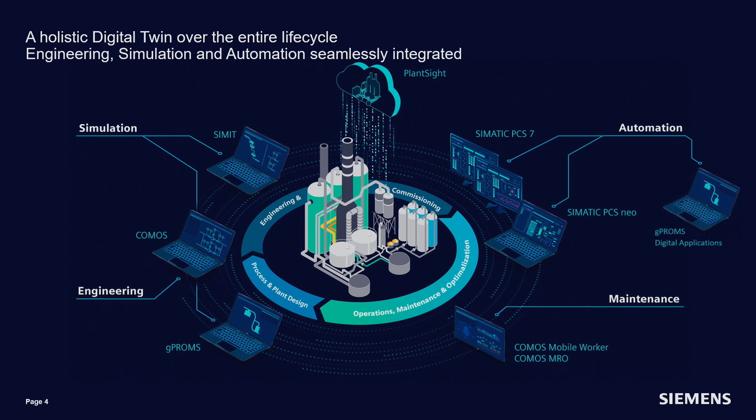We have bundled multiple products inside our software segment. Looking at this picture, we start very early in product design with our simulation suite, with gPROMS for the molecular design of products. It's interesting for us in COMOS for engineering, for the feed engineering phase, to reuse this data. Looking further, we do basic and detail engineering in COMOS, and also with COMOS PCA the first draft of automation software.

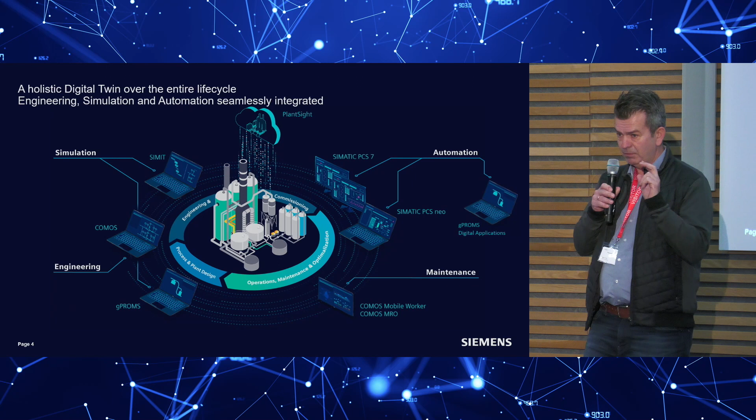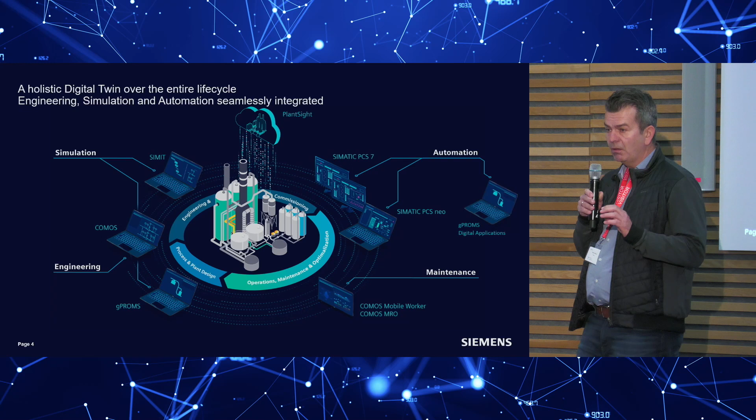It's interesting to simulate the automation software early with SIMIT, and here we're also talking about the exchange of process data. We can think about developing an interface multiple times, or reusing a standard like DEXPI. Looking at the whole picture, we always have this challenge, and we believe at Siemens that we can reduce the amount of development if we focus on industry specific standards.

Looking at the whole life cycle of a process plant, starting with greenfield engineering, but then really a long phase of brownfield engineering - redesigns, upgrades inside the plants happening every day - that means also changes in the documentation.

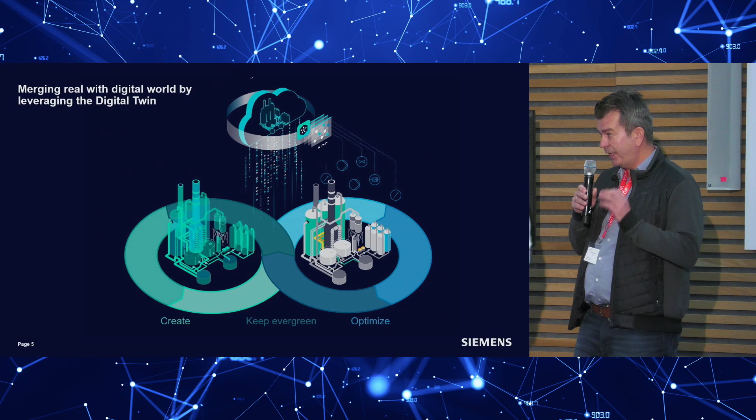That's not always good for us with our solutions. Very often EPCs, engineering partners, are involved using their own tool sets, and then data handovers are always a challenge. That's also a reason why we are here, why we think it's a very nice idea to have this community here to participate, because the main topic is really to be open and to communicate also with other authoring systems across the complete lifecycle phase.

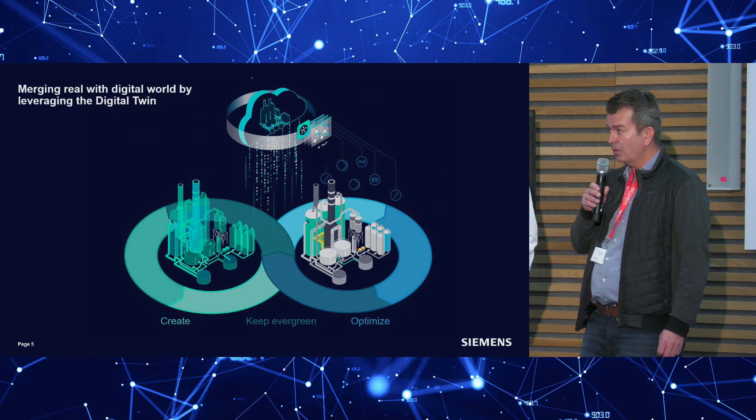With these words, Helge will take over for the presentation. Without much further ado, right? Okay. No problem, so let's do that.

That is the demo content now for my portion over here: get a P&ID in, get datasheet data in, merge that, show that you can search and query it, and potentially change it eventually, and get that out into a DEXPI format.

In the end Ziggy will come back and show you a future development, an outlook on how we would like to use DEXPI as well. We committed as Siemens to use that not only externally but also internally to communicate amongst our tools. We were asked what could you do to get bonus points or credits on ideas how to evolve that potentially.

So let's do that. First thing is get the P&ID in. I've now loaded up our application, COMOS, which is the engineering workbench. I will later also talk about how to use the web front end, but this is more the heavy lifting application for changes. Since I'm supposed to do a change, I will open up the client application. You can also view, query and visualize data in the web front end.

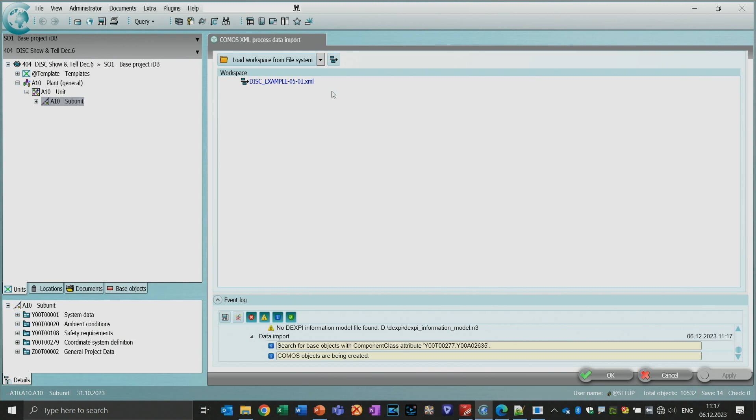So it's now creating objects in the database, as we call it. The object in our database, with object-centric design, is a digital representation of the engineering item, or later in the lifecycle also of the physical operated item. It's done now - so I've got my P&ID over here.

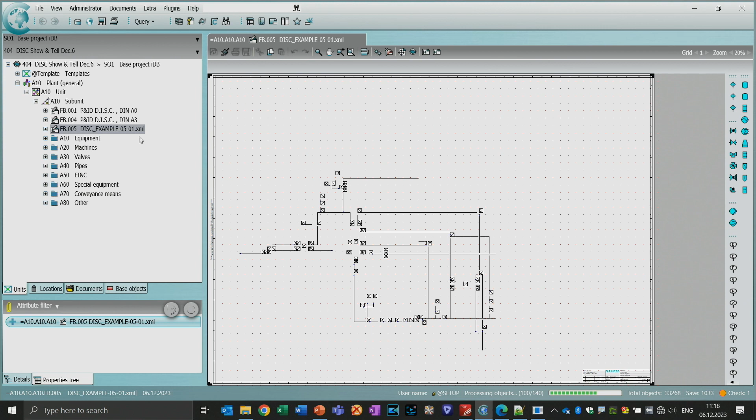Well, which is a fail. Oh boy.

So now you see that it is a live demonstration over here. Okay, let me do that once again. It was just working out fine. I'm not sure what happened here.

Say yes, otherwise I need to pull up the video. Sorry for that. Yeah. I need to hurry up then. Oh boy.

So what I said, we can blame Michael then later on. We really understand the risks of doing live demos, so we really love you guys for actually taking that risk. So we will be patient. Yeah, no, thank you.

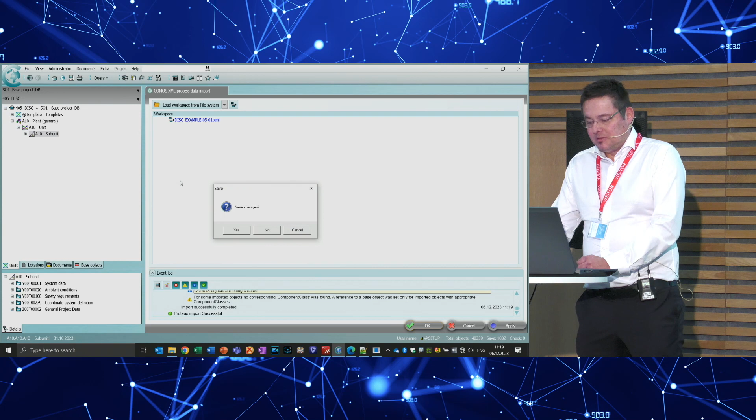So, Proteus is completed. Huh?

Oh boy. Okay, then I need to fall back, just what I did a couple of minutes ago. No, that should work out fine without internet.

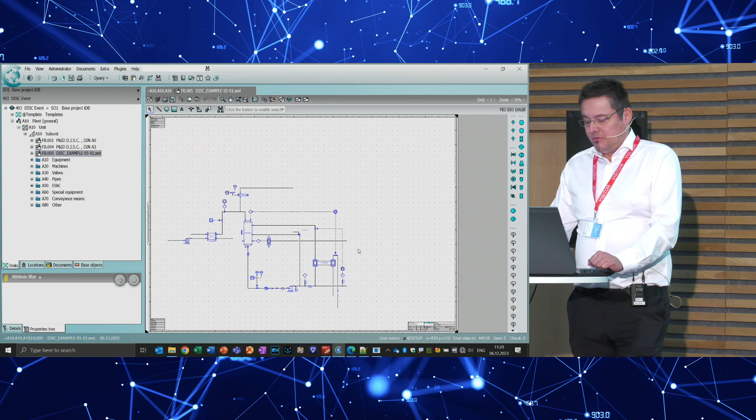So that was actually the way it's supposed to look like. Sorry for that. We'll figure out what the problem was, and then please come to our booth and we can redo that. Unfortunately, so that's the way it is supposed to look, right?

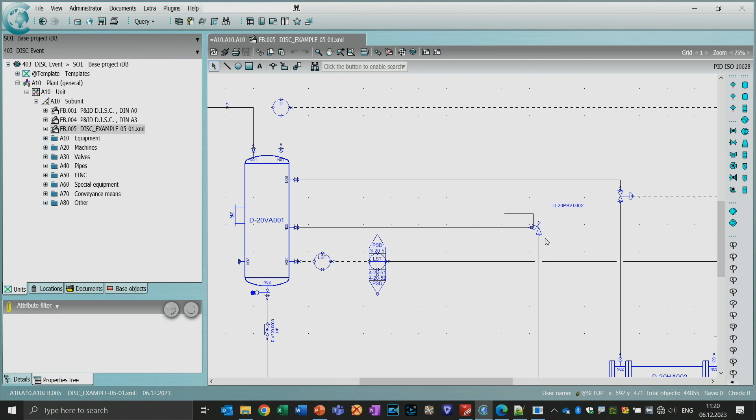After the import, just did that in half an hour ago or something like that. So what we do here is we create the items in the database.

So we have all the items created over here. I think the most important thing is that we also have the pipe objects created, which is the biggest benefit, I believe, with DEXPI, that you have a suitable pipe model. So we can create the objects, the graphics, but also the associated data.

And now we need to come to upload the data to the item. So what we did here, we mapped our class library that we have in Comos, not only to DEXPI but also to the PCA attributes. So we created PCA attributes with their identifier.

We created different views to a single item, so we can have a functional view to the object. We can have a product view to the object. And what I will now do is upload data to this item

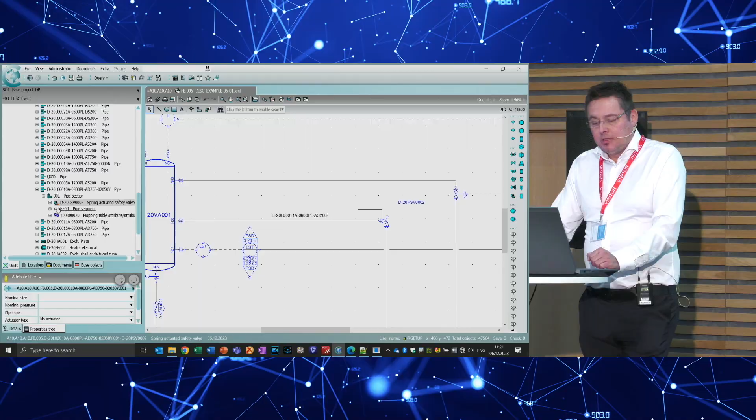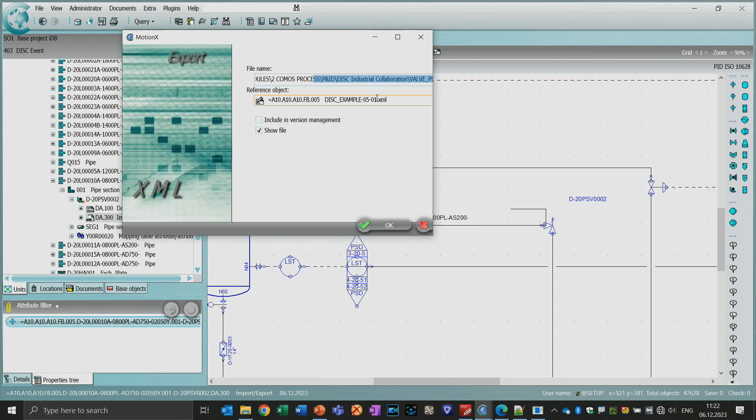through a text file. Yeah. So what we actually did here is we were not using, for the sake of this event, the TTL format or the JSON format. We were using here an XML format. Yeah, so for that moment, the way it looks like is this, like this guy here.

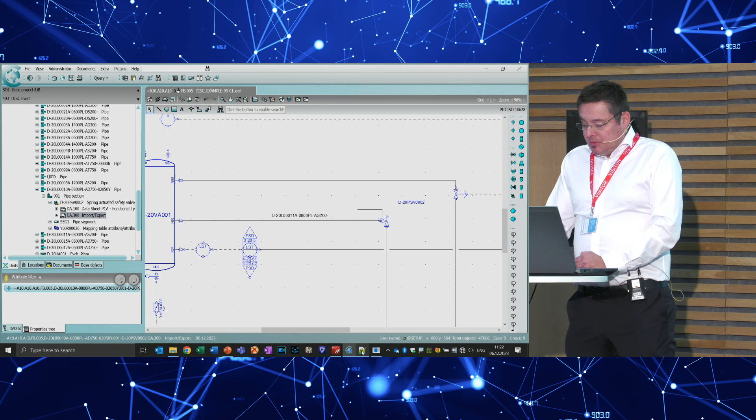So JSON, as required, would require some additional configuration here to map to this particular format. But now, what I can do is I can import data, so I can manipulate this XML file for the import.

Just reload it once again to prevent further hiccups as well. So what I can now do is upload some data. In this case, I need to fill it out manually over here.

Yeah, I've already typed in some values over here, some technical data. Save that. And start the import.

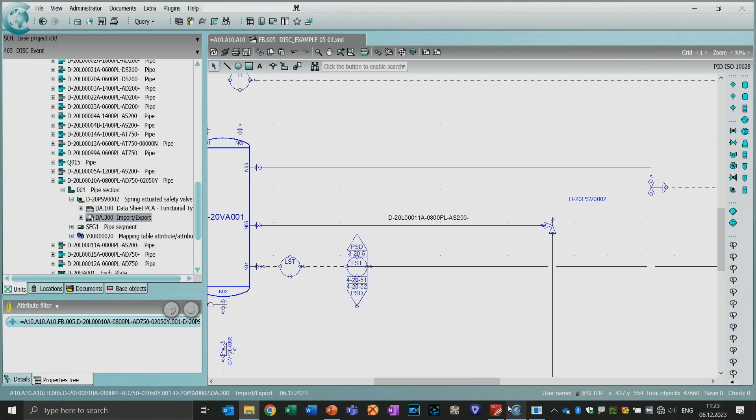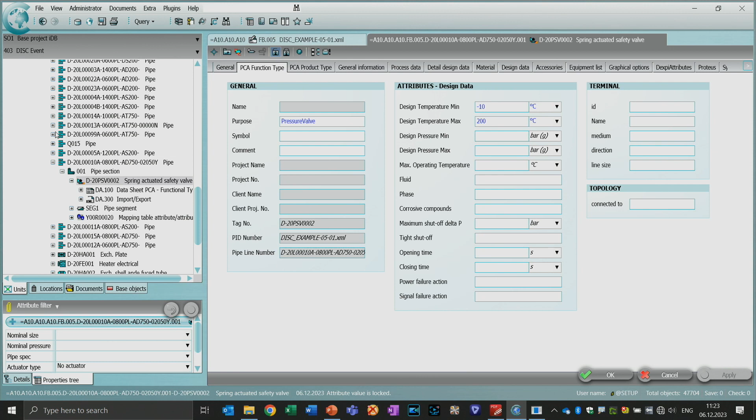So when I open now my data sheet, my data, then I have my data view over here. So I've uploaded my technical data here. This is one view. I can now create a data sheet view as well.

Yeah, that is another view, more suitable to the engineers. I can do an upload, or a different view could be a product type of data sheet. Same or similar data set, but then in a different style, in a different way.

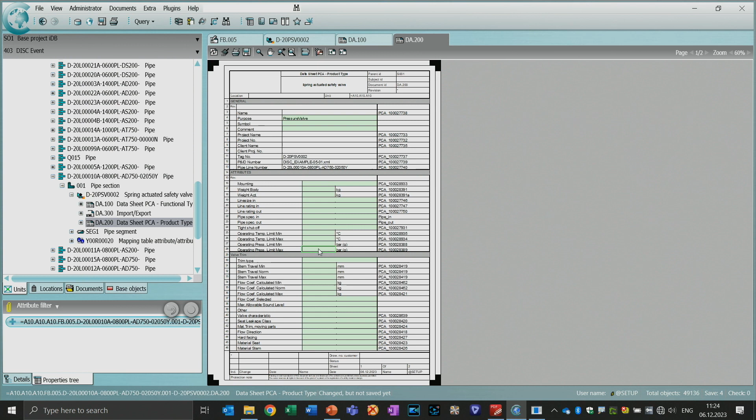Yeah, again, all mapped to the PCA data so far. So we did that conceptually for the proof of concept, or for this event, not proof of concept.

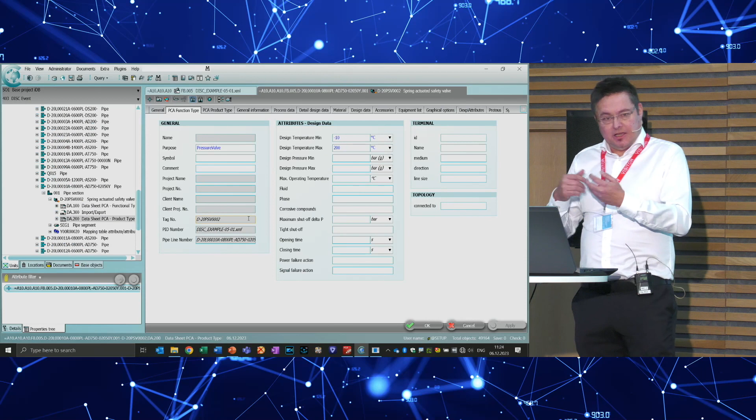So I can query my data. So this is one type of visualization, yeah, data type, more suitable data sheet type. The data sheet layout can be adapted, can be made available through the web browser as well.

So, and then I can query my data. So for instance, I want to search for that particular valve, and I have a searching engine over here, so maybe just search by its function. Yeah, then I can find that.

It's now, since I have it as an object in the database, it's interactive. That means it creates kind of a logic. It's navigatable. Yeah, so I can search for tag IDs, for descriptions, for technical parameters.

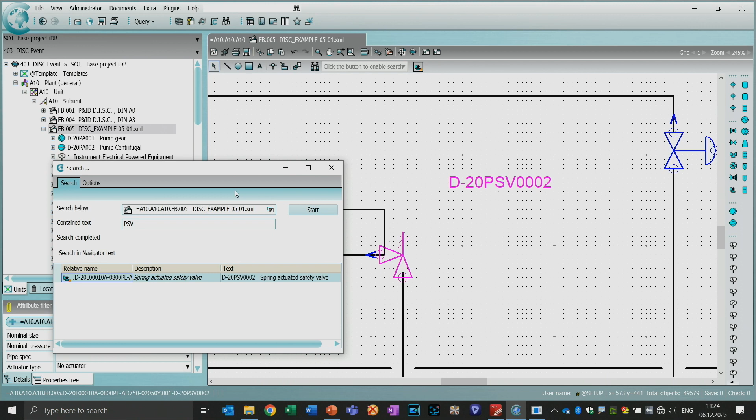But I can also navigate now through the package. That means this object knows to which other objects it is connected to. Yeah, so I can query and navigate, let's say, from this guy over here to its connected items. Yeah, then I see here, okay, this is connected to a pipeline over here.

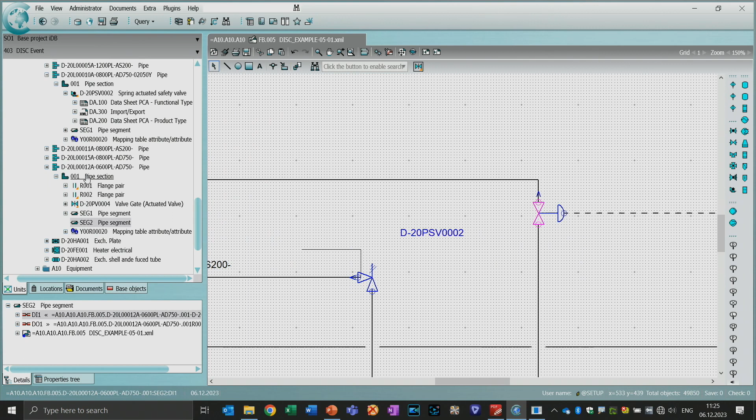And as much, I can navigate, once I have the connectivity information through the DEXPI, I can navigate through the whole package. I can open up a query and query data. I'll save that for the moment.

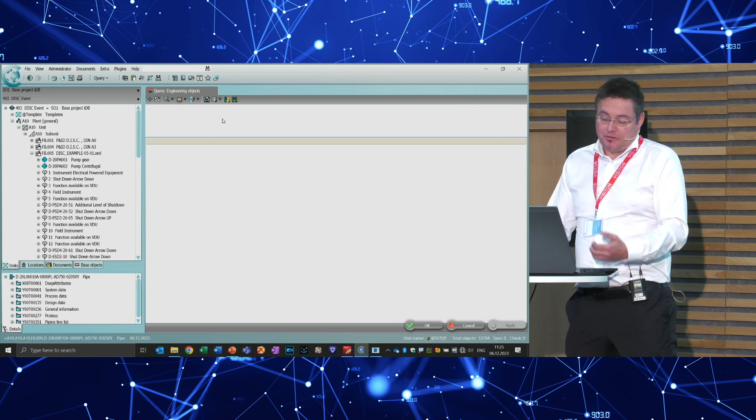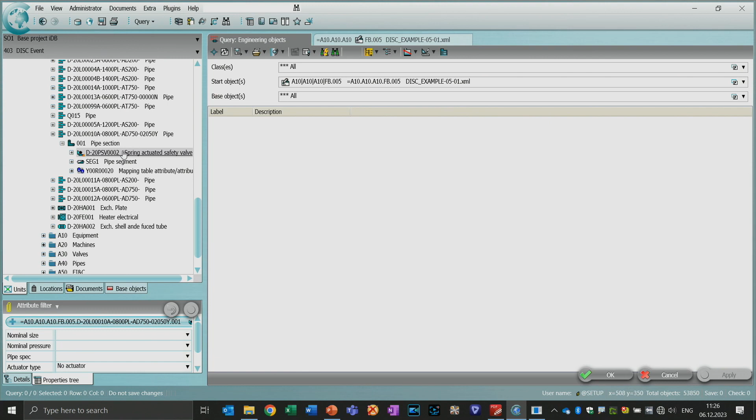This is an engineering query. Since we are a data-centric system, I can create queries just by drag and drop to define what I want to search for. In this case, navigate back, maybe search for all valves. Just by drag and drop, any user could create a query. So I'm searching for all valves. I can annotate and manipulate that and say, show me all the design pressures and temperatures over here.

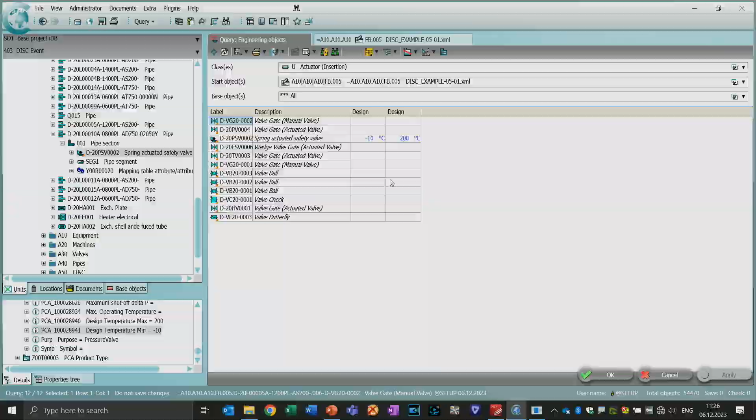So I can use that to bulk manipulate data. That's more an engineering approach, meaning I can now write data to these items as well in a query, in the bulk processing step. So that's around searching, querying, and manipulating data once they are in.

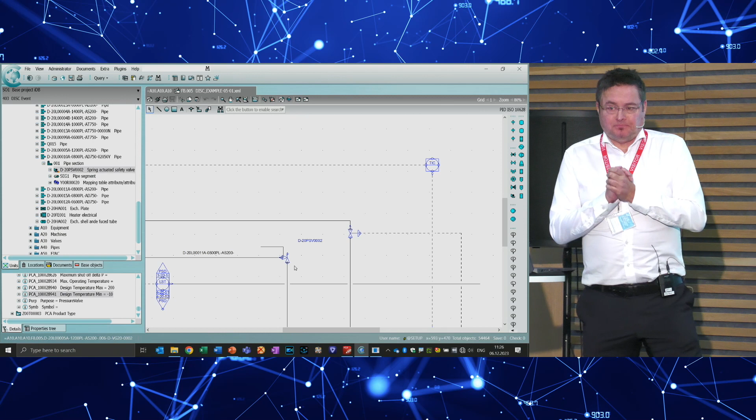Okay, so now it's about changing this information. We have already seen that one thing is to get data in. I can export and import data into most of the applications. I believe it's also important to understand the capability to track changes, see who has changed something and why. So audit trailing, or keeping track and an overview of changes, is important. There are different ways we can do that.

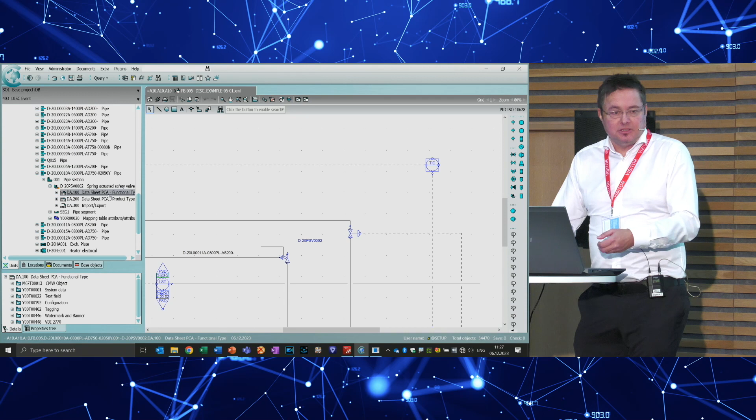First of all, I have a data set that I'm managing for that valve here. But on the other hand, I have a data sheet, and that is an engineering artifact that also needs to be treated and managed like a document and put under revision control, because that is one means of keeping track of changes, and also of making sure that information isn't changed without notification, approval, and acknowledgement.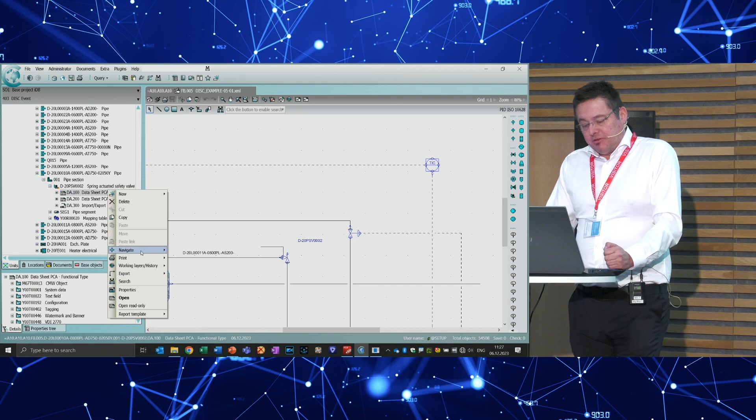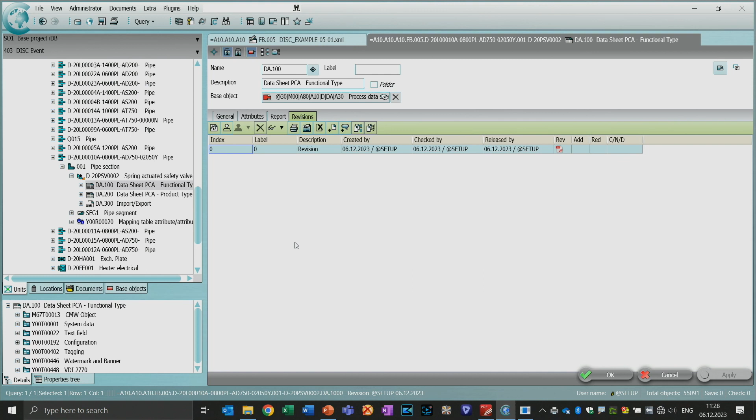So therefore, I can put this document under revision control. That's a simple click here. From that point onwards, I want to track my changes on this particular artifact. That means I have now created the first initial revision of a document, and now I will apply a change to this document.

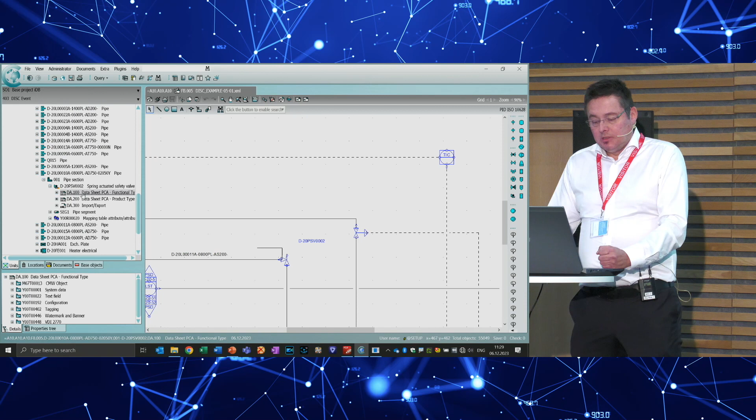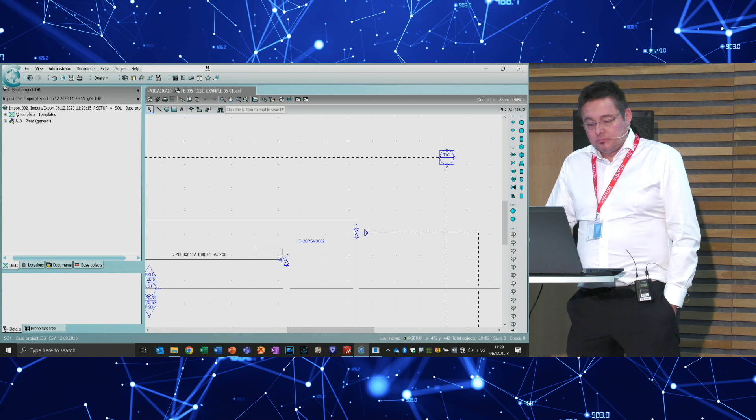And I will also track our auditing capabilities over here, so I do the upload once again. So what I got now, when I open up my data sheet, is what did I change? What was changed through the second import of data, or through the second change? I can see that represented on the data sheet.

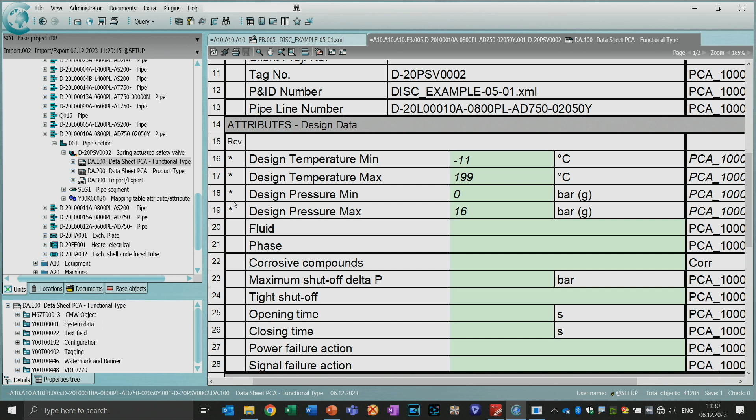First by this italic lettering, but also by this asterisk here, because we have revision control not only on the data sheet, but also on the underlying data set. That means what COMOS does here is, I have changed an approved revision of a document, although I have changed the underlying data set, and I can track that here now.

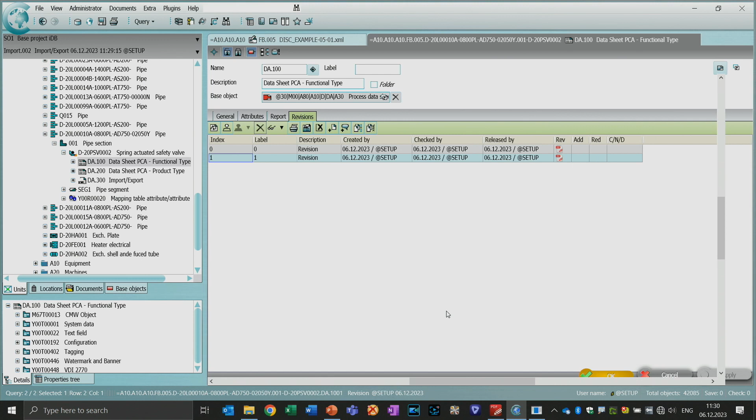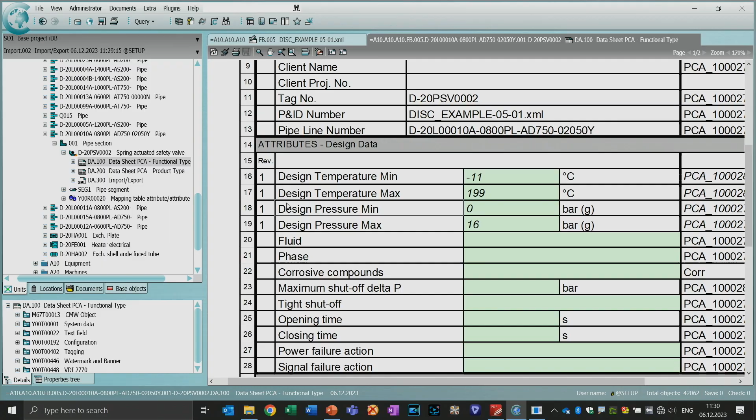When I now create a new revision of that, I'm actually asked to run it through the cycle once again. That's what I can do now. When I open my data sheet once again, you see this revision step printed in here. So that's not only safeguarding the data set, but also the derived engineering artifact, the data sheet. Now if I do that for hundreds of data sheets, how can I keep track of that?

We can also switch on an additional visualization of changes over here. That means I have a color coding in the system. Now, since I was the one who changed it, it's obviously easy for me to know what's been changed. But if another person comes in and says, 'What happened in the last week, or during the last change period?' then I have the capability to visualize these changes.

So we have an indication: light blue means something is changed in this plant breakdown structure underneath. So I can see there's something underneath the pipe here, and I can find my valve and see that these particular attributes have been changed through my latest change.

So, changing the data sheet, I've already done that. Visualizing changes, I've shown that too. So the next step would be changing the P&ID and getting that out as a DEXPI file. And what we said here, because time was short to collaborate with any other vendor, was: use the verification tool for the moment, and show what the outcome has been.

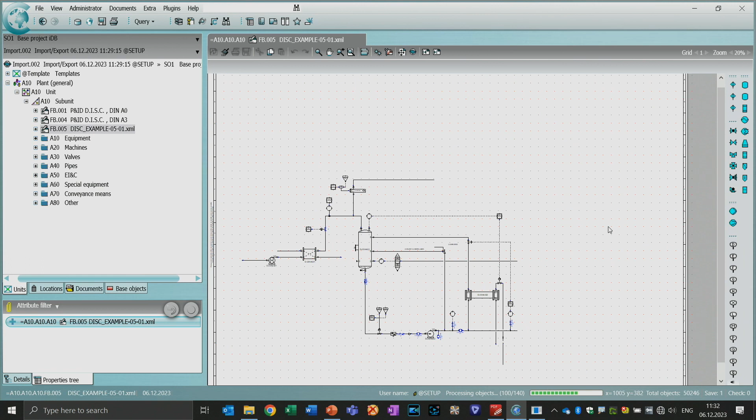So let's apply a change. I was thinking, okay, just get a new valve in here. I can go now to my class library, because our engineering workbench relies on the class library. We have our own definitions, but that can be mapped to client requirements and to DEXPI class definitions as well. That's what we did in the preparation stage here. So I'll get another valve in here.

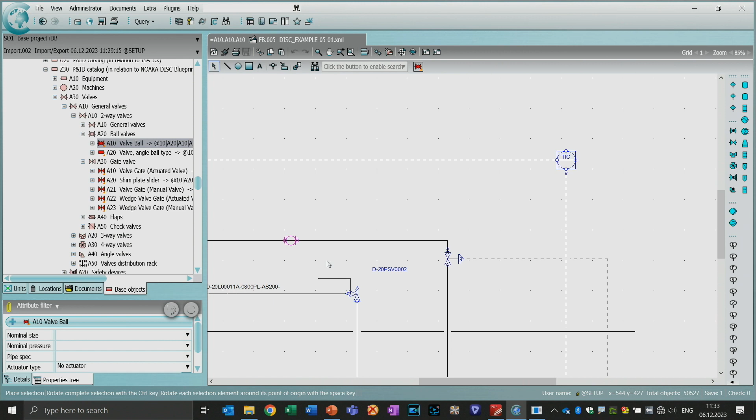Yeah, so that's what I can do now. So we just keep it simple over here, place things, delete things, change things from data changes, already shown that

So therefore, we have an exporter as well. So what I can do here is I can export 1 to n P&IDs and write that into a DEXPI format. I can therefore create what we call a scope or a work package. I can package these documents or these exports, and then I can drag and drop my P&ID in here, and now start the export.

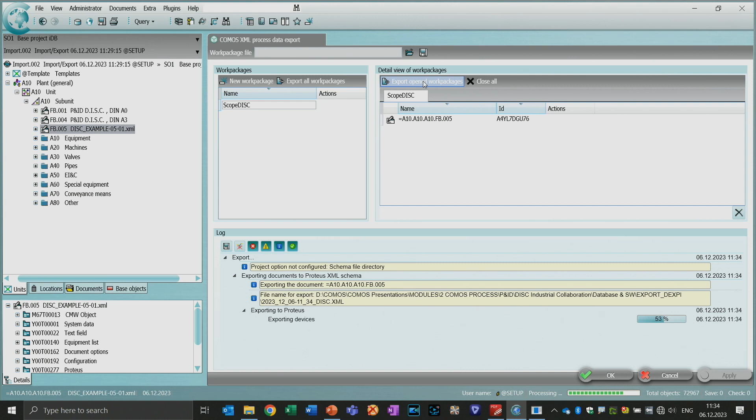I've defined for the demo an exchange folder in this case. So what it's now doing is it's taking our file and writes that into a DEXPI compliant format. So that takes probably a minute or something like that. So it's now collecting all the devices by its class definition, yeah, and creates the XML file.

In the meantime, while it's doing that, probably takes a minute or so, I can give you quickly a glimpse on the web viewer. So what I was mentioning before is that the web front end is available as well. That is typically for viewing, searching, querying information, just viewing it.

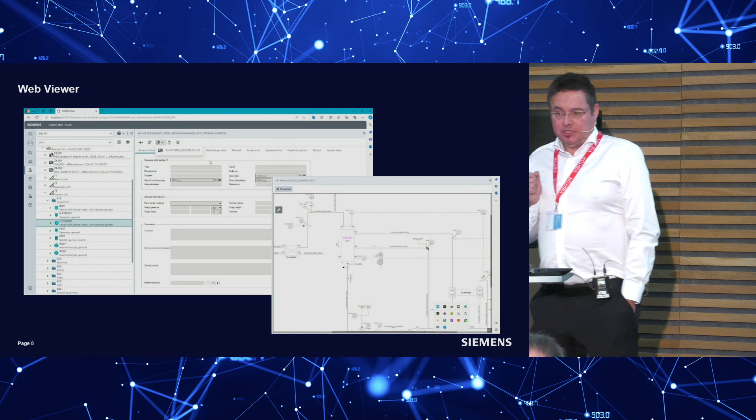Also do the annotation bit, yeah, because the change typically comes with an annotation as well. So we can also manage the P&ID as a document, also can create revisions, annotations on revisions, put them into workflows as well, similar to the datasheet. Track changes on the P&ID, and then have that visible and viewable through the web front end there as well. I like the idea of doing color coding and restructuring P&IDs as well.

Ziggy will explain a little bit or elaborate on that one further, because that is one idea. Obviously, once you have a P&ID, you want to restructure it for specific purposes, do color coding and restructuring on commissioning, use it for automation purposes. That is what Ziggy will elaborate on.

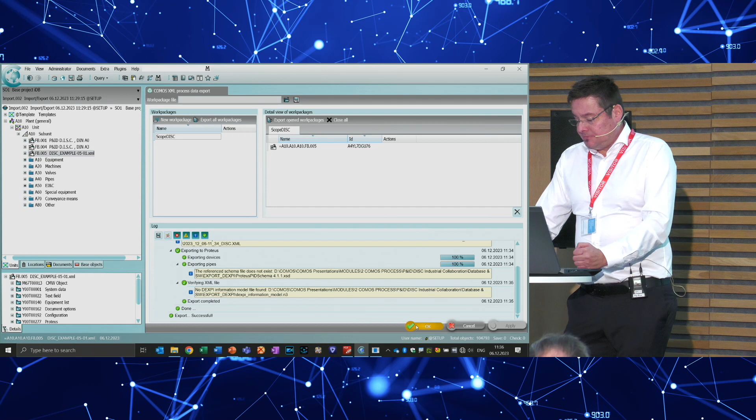So now we got the export done. So I have now here my verification tool, and that is the one that I've just created over here. See, it's the timestamp here. Let's hope that this one now comes up, and not also black boxes here. Oh man, sorry for that.

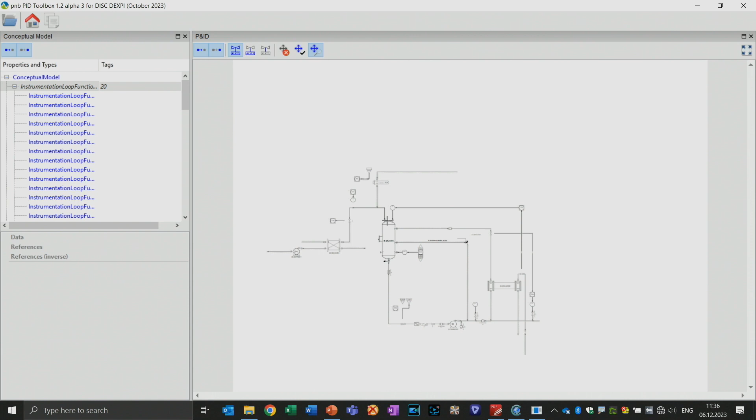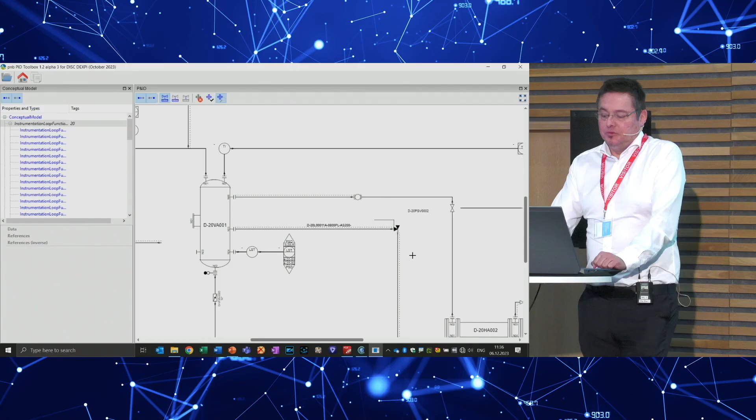So in the end, I have to confess what we did is it's not 100% compliant to the format, so you will probably see that there is still some stuff that we need to do a mapping on. But we just thought, okay, let's show the basic capabilities. What we would need to do is map our data model a little bit more to the DEXPI export to be compliant to that particular format. But basically you see that the change is applied and it is written and available here in the DEXPI format.

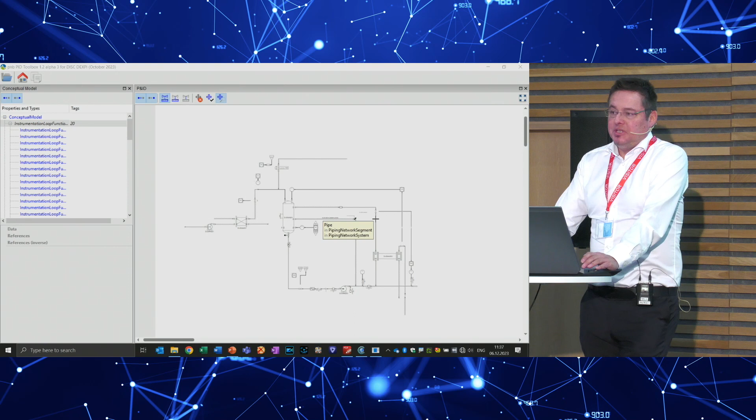Okay, so much for the workflow that was asked for. We said, okay, one thing was, what can you do with PDF? There was a requirement actually coming from you guys to turn PDF and dump data into DEXPI compliant PIDs through some magic, I would say. What we did, we are working on that one. We have to say that we are not yet ready to show that here in an audience like that.

Therefore, we just decided, okay, we also have capabilities to retrieve at least some intelligence from scanned and PDF PIDs or PDF schematics in general. Therefore, we said, okay, let's show what we call a hotspotter tool. Is it working? Oh yeah, okay.

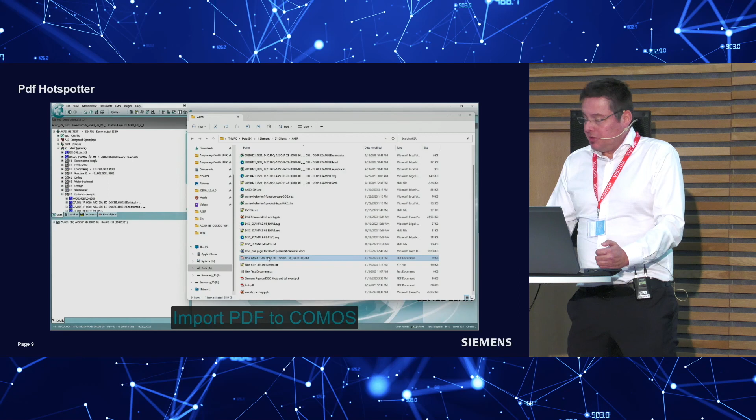So we just took another PID in a PDF format, loaded that into our application, and what we can do in the loading step, again, it is treated partially as a document. So COMOS is an engineering document management system. That means we take engineering artifacts and treat them like documents, but we manage the underlying data sets. And what we do here in the loading step is that we retrieve some intelligence from the PID.

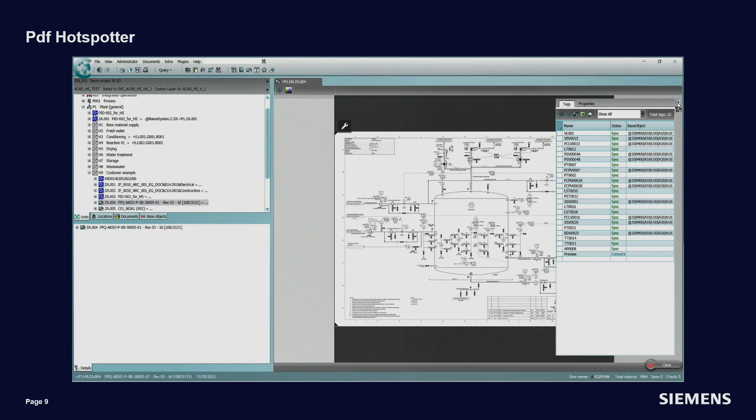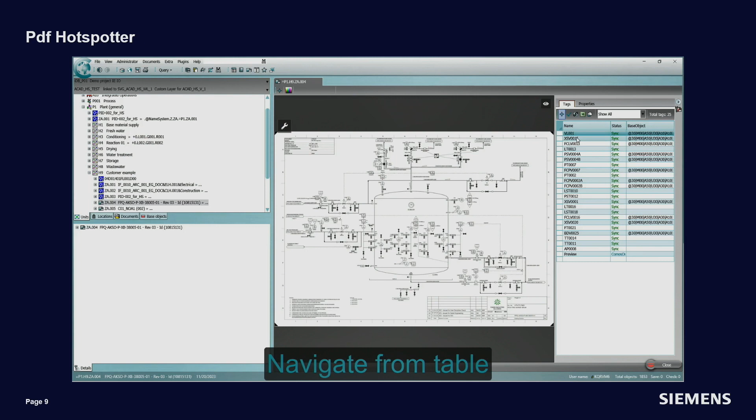So we can define searching patterns, for instance, search for specific tag IDs. We can also consider specific formats, like when you have line breaks in an instrument bubble, for instance, and you need to concatenate things from different text blocks, then there is some intelligence provided here. So I can define my searching patterns. I can also define, hey, search around something near that instrument bubble. For instance, it takes a D-38 and the EXSV and concatenates that.

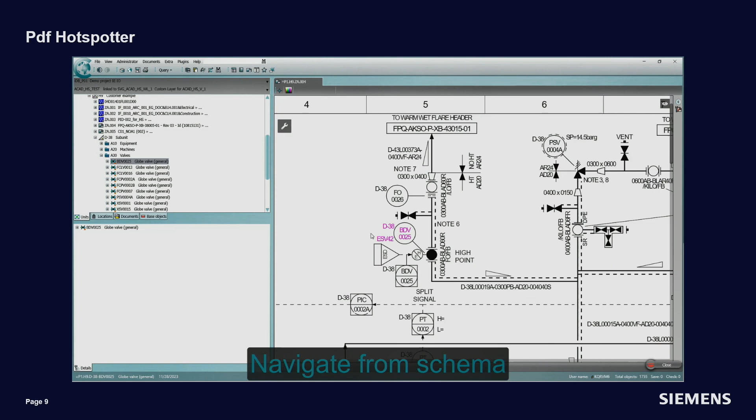So it can create tag information from individual artifacts, so it's more than just searching for text blocks. And it can actually do some hotspotting. What I can do is treat it as a document. I have some graphics representation on the P&ID, but I also retrieved information and can link it to our COMOS objects, giving at least some navigation and exchange capabilities.

It's not a smart DEXPI P&ID. I cannot manipulate that drawing. In case I want to change it, I need to change the originating CAD file, typically, and do an upload of the changed PDF and a reload. This tool will realize it has already been uploaded and there are changes, and items are already linked, so it will only show you what's been deleted, what's new, and maybe changed. So it's supporting that engineering work step, but still not creating an intelligent DEXPI file.

We are working on that. We have a group right now working, we call that IDAMA, Artificial Intelligence Data Management. These guys have the task to develop and use artificial intelligence routines to create a DEXPI P&ID from a PDF or text or document hard copy scan, so to say. Maybe in one of the future sessions.

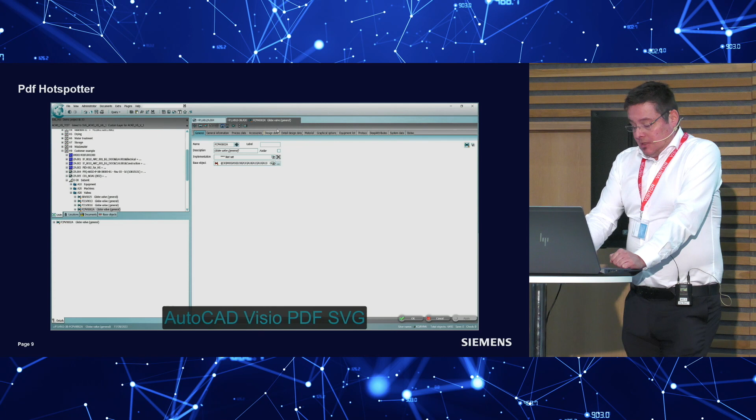So, Ziggy, maybe this is now what we are delivering today. Ziggy will give you a few words on how we want to use DEXPI formats, in particular in the automation area, and where we have an initiative or tool development called Requirement Module Type Packages, RMTP.

Okay, thank you, Helga. Now we are moving a little bit into automation. But nevertheless, the idea was how we can reuse DEXPI data for other use cases. Here we are talking about module type packages. We are talking about modular plant design, and if we are talking about modular plant design, we are also talking about modular automation. I don't know if maybe some of you already heard about the MTP standard.

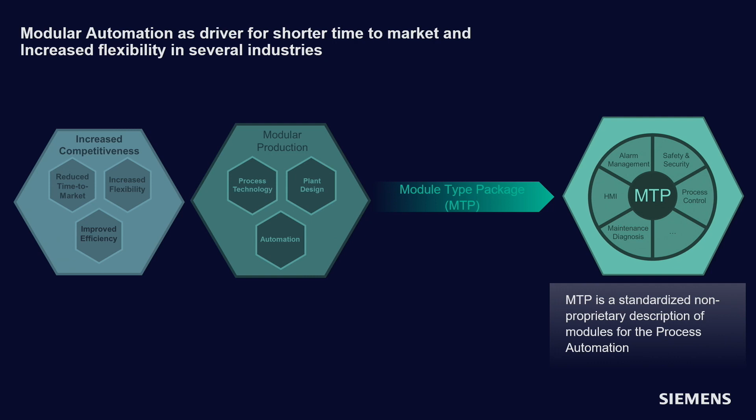It's a developing standard driven by NAMUR, now by ZVEI in Germany. Not only Siemens, maybe all DCS vendors are already part of this community. The big target is to develop a standard, non-proprietary automation software for specific own-controlled process modules. The idea is, if something needs to be exchanged in a process plant, you don't have to wait maybe some weeks because DCS software needs to be adapted because you bought a system not from Siemens, maybe from ABB, and then it doesn't fit together. With MTP technology, you can be very fast again in production.

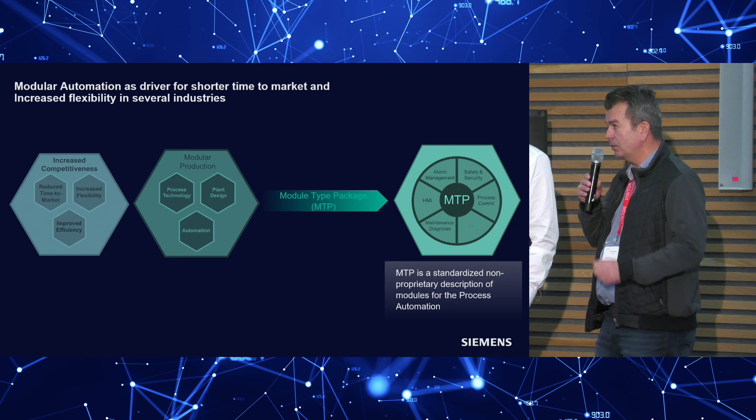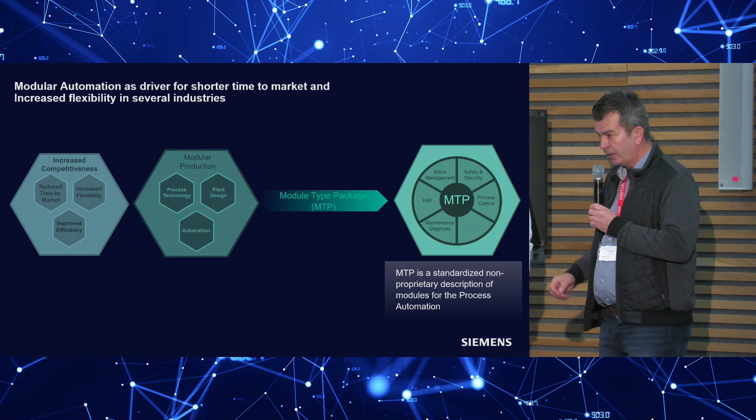And our idea was how we can contribute to this with Comos. We have prepared a small video for you where we are creating some plant engineering with Comos, but we are exporting DEXPI. That means the plant engineering can come from any other vendor. And we are enhancing this information for the requirement description, what capabilities a process module should have from the perspective of an automation view.

Hello all. Welcome to a short demonstration of the modular plant automation configurator, a cloud-based application. Let's see the main use case of this application. In the process engineering phase, all data is created and configured in plant engineering software.

For automation engineering, functional description data will be manually created and documented in the form of big Word or Excel files. This data is also not tightly integrated with process engineering software. To overcome this manual step, we have built this cloud-based application.

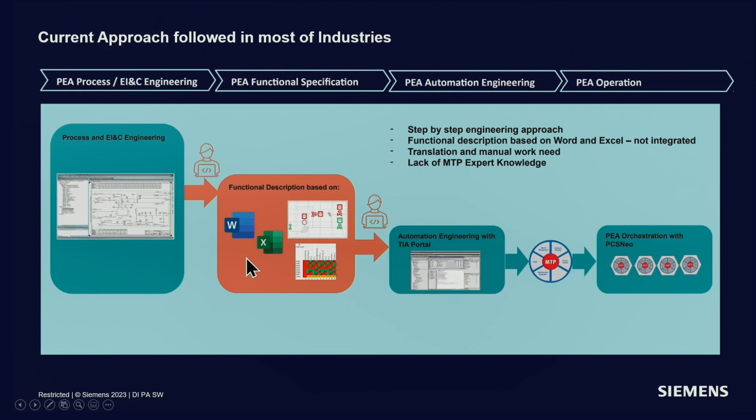Let's see the functional overview of our application. The workflow will start with plant engineering software. All the process data is already configured in this software. This data will be exported in the form of standardized Proteus format.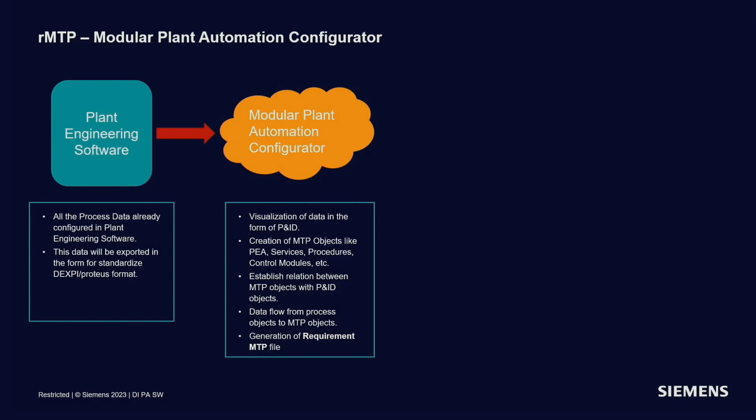The next step will be importing this data into our application and carrying out certain steps, like visualization of data in the form of P&ID, creation of MTP objects like process equipment assembly, services, procedures, control modules, etc., and establishing relations between MTP objects and P&ID objects.

Generation of the requirement MTP file. This file will be consumed in automation software where detailed automation engineering steps will be carried out and a fully configured MTP file will be generated.

Current targeted use cases for this application are reuse of already available process data to reduce manual efforts, standardized and digitalized generation of function description for automation, and input data that can come from any plant engineering software in standard Proteus format.

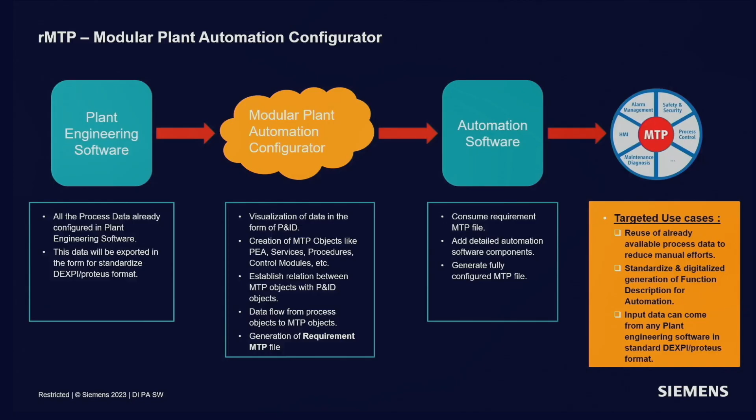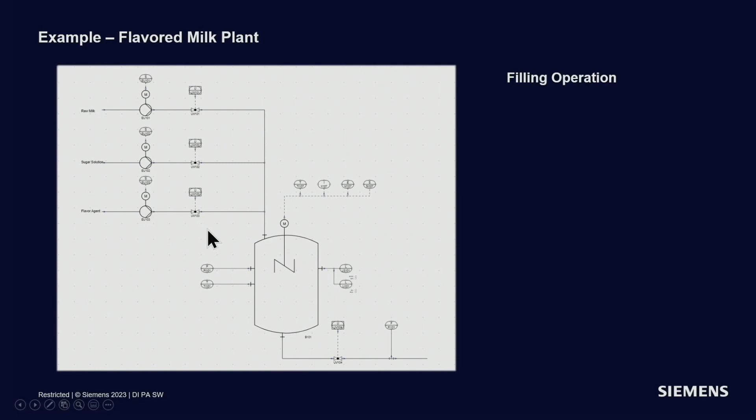With this short overview, we would like to show you a short demonstration of our application. For demonstration purposes, we have taken the example of a premix tank section of a flavored milk plant. This premix tank section will be divided into two operations: filling operation and mixing operation. Filling operation will have three procedures. First, flavored milk with sugar, where all three filling lines will be used.

Second, sweet milk where raw milk and sugar solution line will be used only. Last, flavored milk without sugar where raw milk and flavor agent line will be used. Mixing operation will be manual and time-based.

Let's see how this example will be realized in our application. As mentioned earlier, our workflow is started from Comos application, where the example P&ID is already created. All the required process data is filled in, like measuring range for pressure transmitter and for temperature transmitter, as 0 to 55 degrees Celsius.

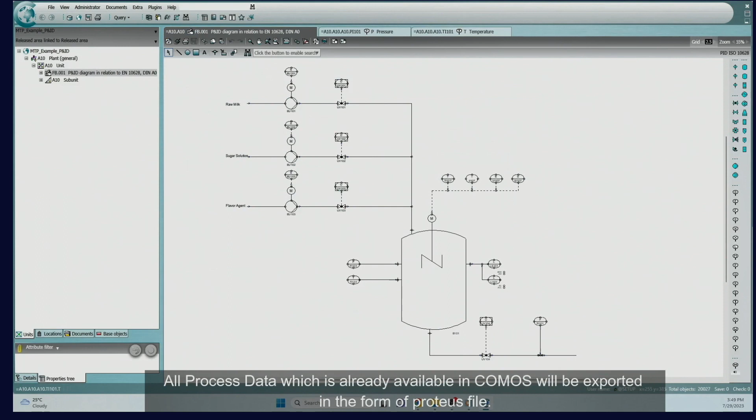This data is exported in the form of a Proteus file. This is our application UI, where we import this data in the form of a zip file. After successful import, when we start project configuration, imported data will be visualized in the form of P&ID and plant breakdown structure. If we see details of the pressure transmitter, all the configured data is also available in our application.

As a next step, we will start creating MTP objects. We will create a process equipment assembly object, and under that, we will create our first service object for filling operation. Now we will assign P&ID objects to the filling service to establish relation between physical and MTP nodes.

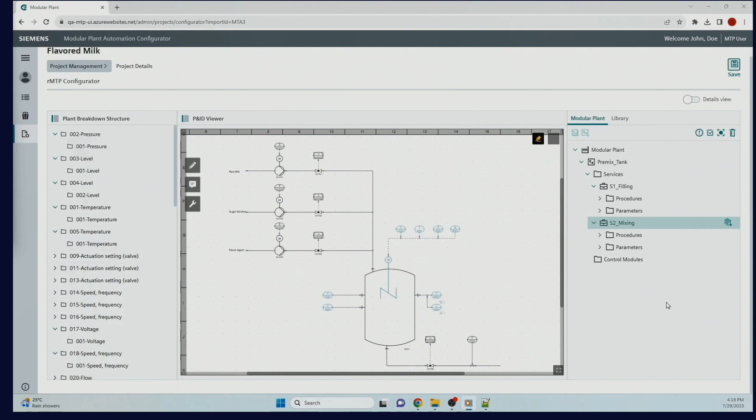We will select objects from all filling lines and level transmitter from P&ID and assign them to filling service. Similarly, we have created another service for mixing operation and assigned P&ID objects to it. By selecting each service node, P&ID objects will be highlighted in a given color for proper identification.

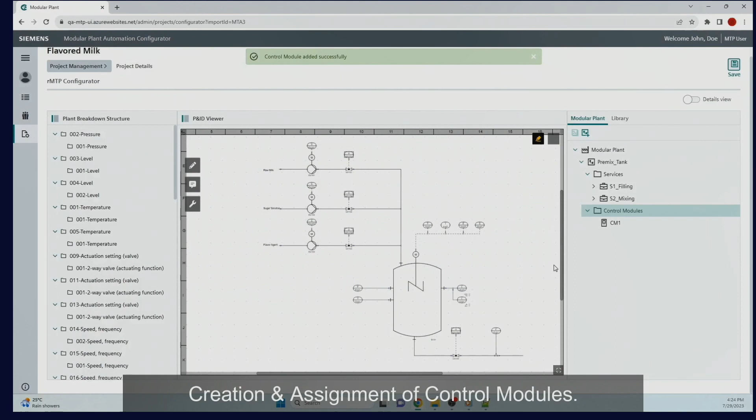We have already created procedure objects as explained earlier and associated parameters required for those procedures. Now, let's create control modules. A control module is a collection of sensors, actuators, and associated processing equipment which is operated as a single entity.

Next, we will assign P&ID objects to these control modules so that process data which is available in P&ID objects can be transferred to control modules. Next step is to assign MTP library types to these control modules.

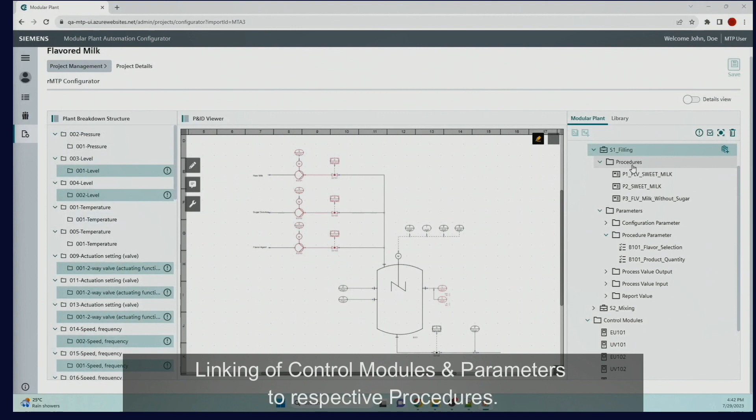Once we do that, we can see the process data gets transferred to parameters of control modules. This will save manual effort of adding these values one by one. Now we will see how we can establish relation between procedures, required control modules, and parameters.

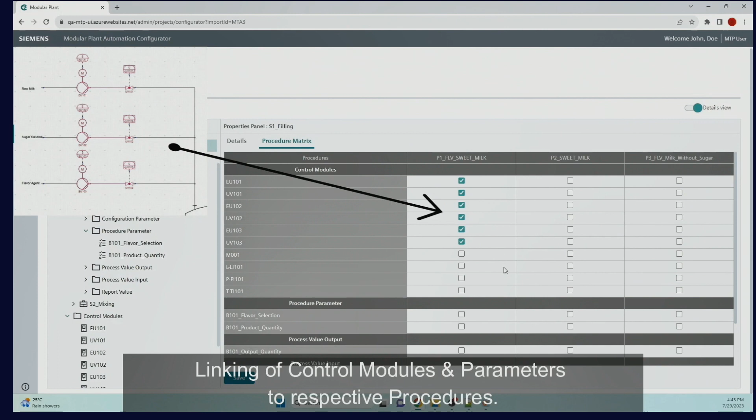When we go into the details section of the service object, we can establish this relation in the form of a procedure matrix. For the first procedure, which is flavored milk with sugar, we require all filling lines, so we will select all control modules placed on these lines. Since we also require flavor for this product, we will select the flavor selection parameter.

This is how the procedure matrix will look once we define it for all procedures under filling service. Similarly, we have defined a procedure matrix for mixing service. Once we complete all this configuration, we will export it in the form of an MTP file. The generated MTP file will be stored in the cloud, and the user can download this file to his local machine.

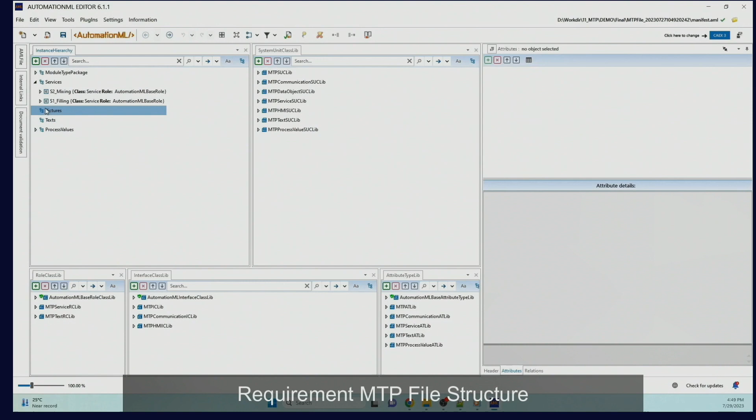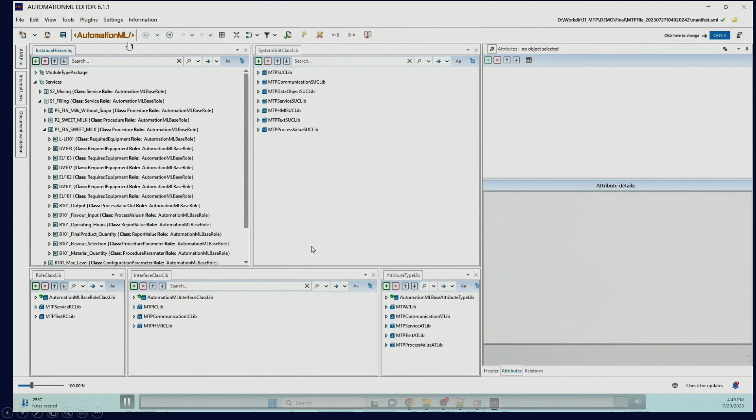Let's see how the exported configuration looks in MTP format. As per the configuration, we can see filling and mixing service in the service section. All created procedures are available under the service object, and all the linked control modules and parameters appeared under each procedure. That's it from our side. As discussed earlier, this file will be consumed by automation software for further processing.